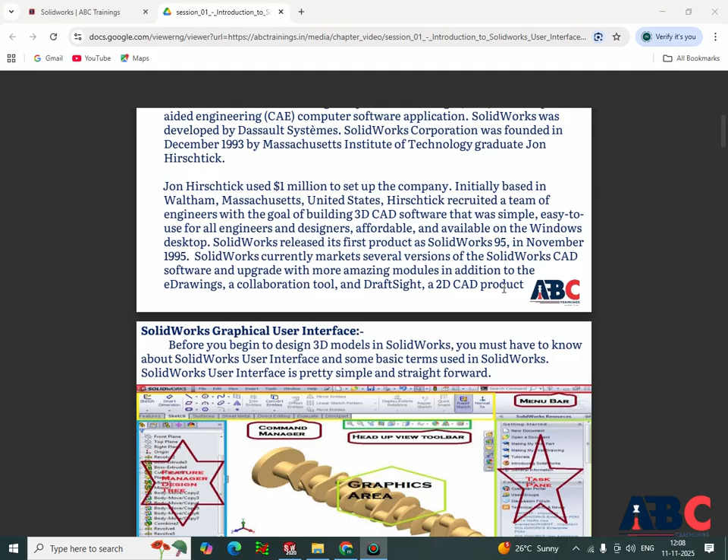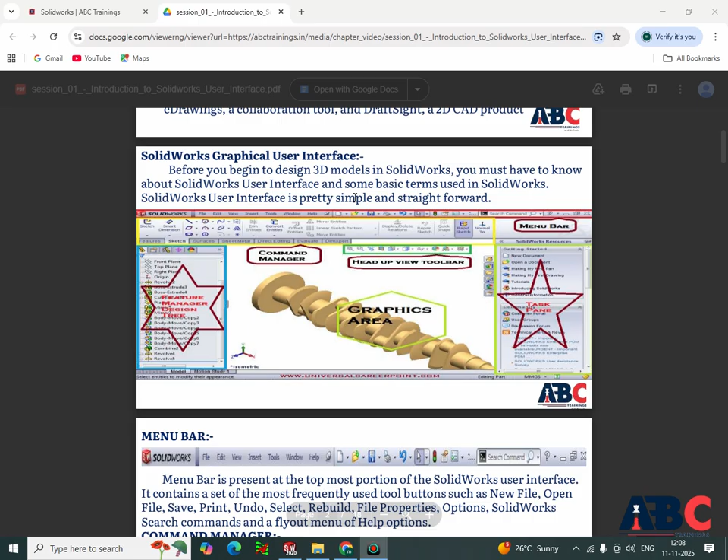SolidWorks graphical user interface. Before you begin designing 3D models in SolidWorks, you must know about the SolidWorks user interface and some basic terms used in SolidWorks. The SolidWorks user interface is pretty simple and straightforward.

See this, what is the menu bar? This is SolidWorks' menu bar. The menu bar is present at the top portion of the SolidWorks user interface. It contains a set of most frequently used tool buttons such as New Files, Open Files, Save, Print, Undo, Select, Rebuild, File Properties option, SolidWorks Search command, and a flyout menu of the Help option.

Command Manager tabs are present just above the drawing area, or just below the menu bar, which gives access to part, assembly, and drawing editing tools. It consists of all the most frequently used productive tools for the designing process, with subsections such as Features, Sketch, Direct Editing, Evaluate, DimXpert, Office Products. When you click on a required Command Manager tab, it shows the respective toolbar.

Feature Manager Design Tree - see this, this is the Feature Manager Design Tree. What is it? This Feature Manager Design Tree, on the left side of the SolidWorks window, provides an outline overview. This feature makes it easy to edit and modify the properties of the design by selecting individual tree functions.

What is the Property Manager? The Property Manager appears in the left panel of the SolidWorks window interface when you select many of the SolidWorks commands such as sketches, extrude feature, and so on. This Property Manager is used to set the properties and other relevant command options to complete your design parameters. It opens when you select entities or commands defined on the Property Manager.

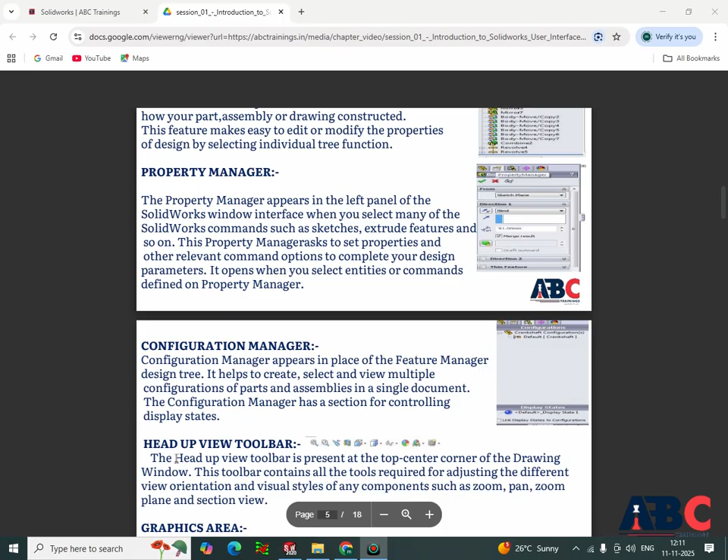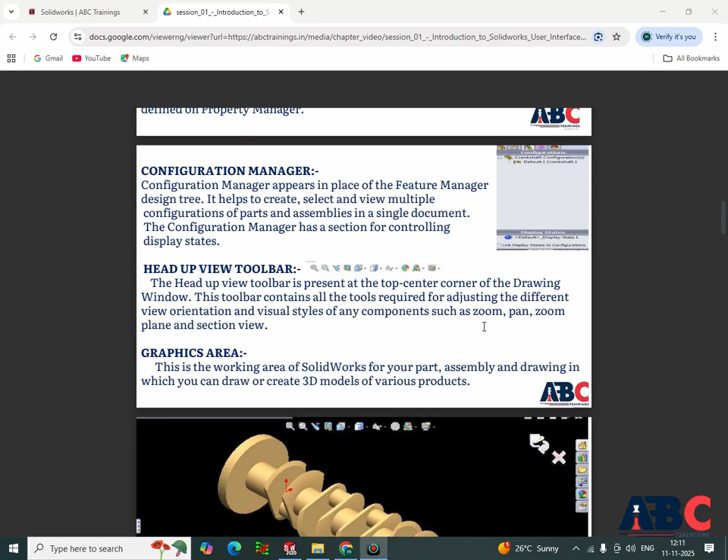Head Up View toolbar - the Head Up View toolbar is present at the top center corner of the drawing window. This toolbar contains all the tools required for adjusting the different view orientations and visual styles of any component, such as zoom, pan, section view, graphics area.

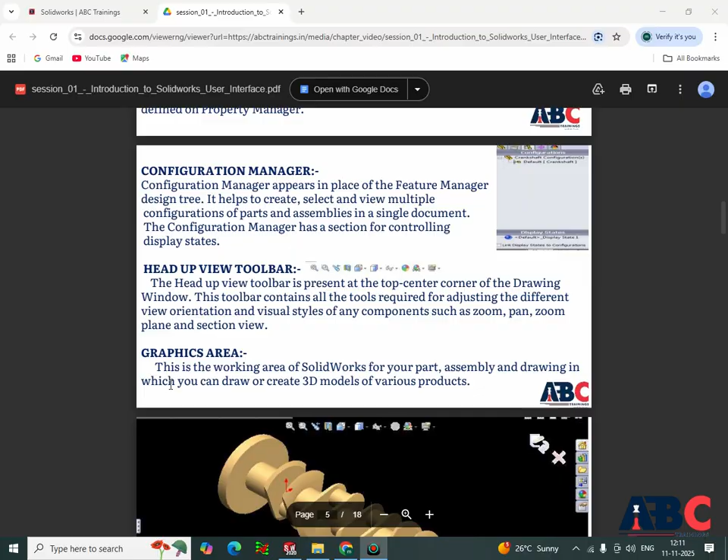This is the working area of SolidWorks for your part, assembly, and drawing, in which you can draw or create 3D models of various products. This is the graphics area. This is the Task Pane. The Task Pane appears on the right side of the window interface.

When you open the SolidWorks software, it provides access to SolidWorks Resources, libraries of reusable design elements for you to drag onto drawing sheets, and other useful items and information. For example, SolidWorks Resource, Design Library, File Explorer, View Palette, Document Recovery, etc.

The status bar at the bottom of the SolidWorks window provides information related to the function you are performing, such as sketch status, coordinate information, commonly used measurement unit, callouts, and handles. Callouts are text-filled boxes that appear in the graphics area when you use certain tools. Handles allow you to dynamically click, move, and set certain parameters without leaving the graphics area.

What are callouts? See these, these are callouts. Callouts help you easily distinguish between different entities. For example, this callout shows the sweep profile and the sweep path. You can drag these callouts to reposition them, but you cannot use them to change any properties of the entity to which they refer.

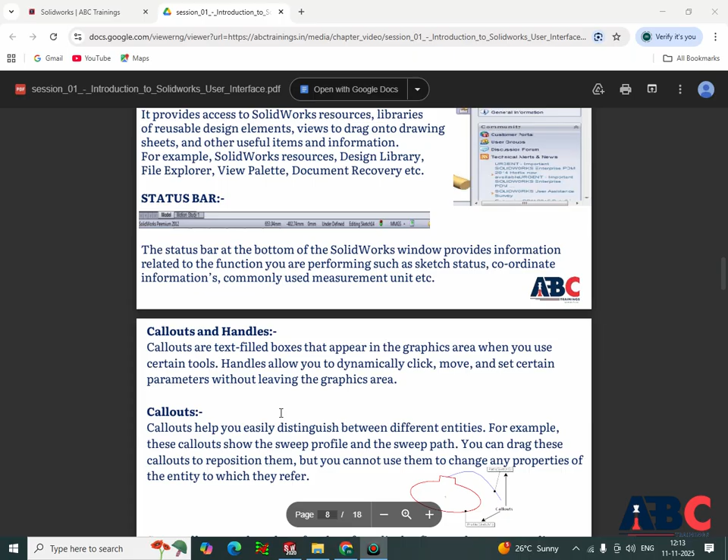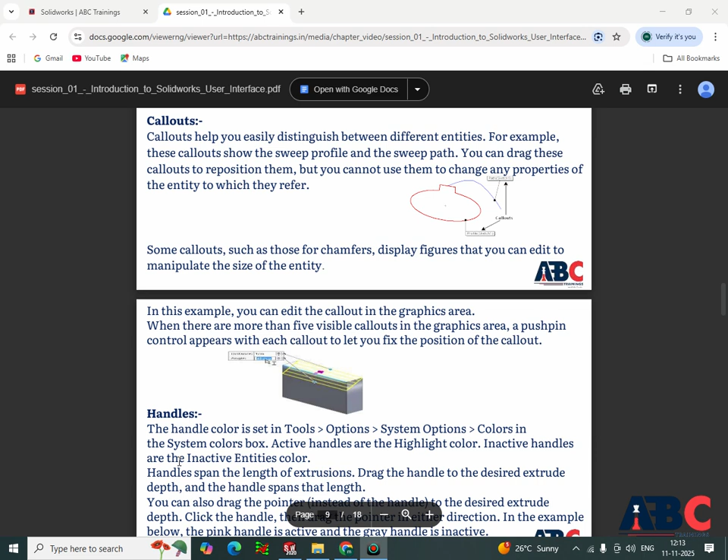Handles: the handle color is set in Tools, Options, System Options, Colors in the System colors box. Active handles are the highlight color. Inactive handles are the inactive entities color.

Handles span the length of extrusion. Drag the handle to the desired extrude depth and the handle spans that length. You can also drag the pointer to the desired extrude depth. Click the handle, then drag the pointer in either direction.

In the example below, the pink handle is active and the gray handle is inactive. One handle has one arrowhead and the other handle has two arrowheads to help you see which direction the handle applies to.

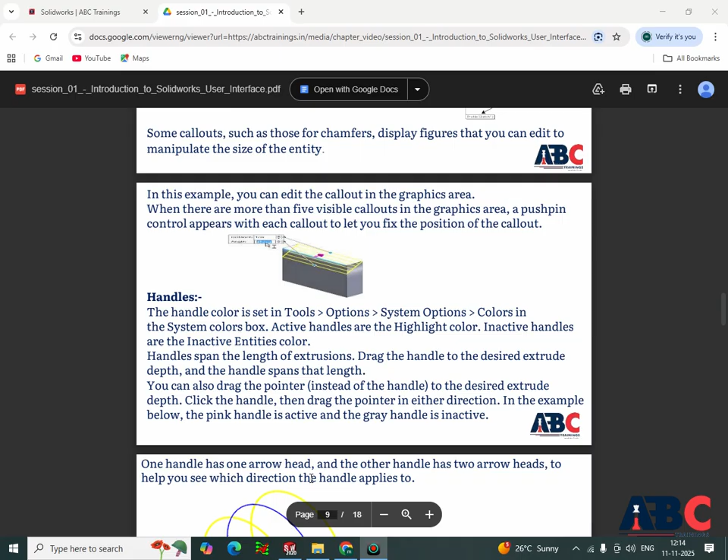To help speed up your workflow in SolidWorks, the confirmation corner can now be more readily accessed at the mouse pointer location by pressing the D key on your keyboard.

When Property Manager is active, the OK and Cancel options are located in the upper left corner of the Property Manager, and in the confirmation corner in the top right corner of the graphics area. But your pointer may be in the middle of the graphics area where you are manipulating the model, so press the D key.

The confirmation corner will appear next to your mouse pointer. See the figure given below.

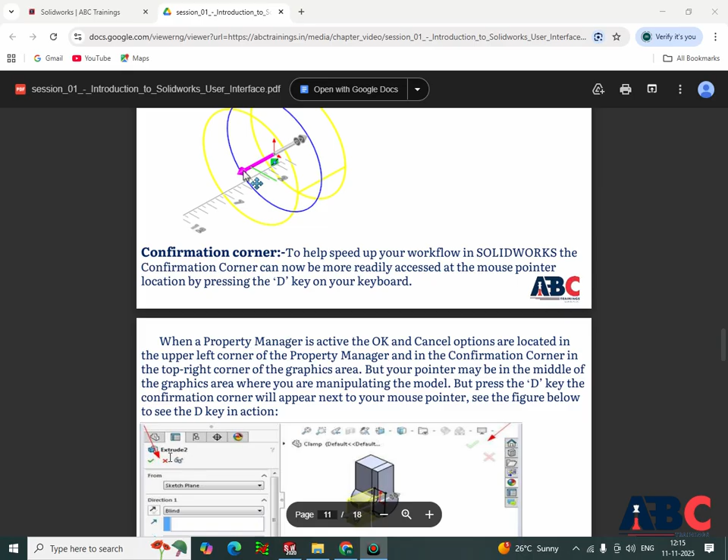Rotate view: parts and assembly. To rotate the model view, drag the middle mouse button. To rotate about a vertex, edge or face, middle click the vertex, edge or face, then middle drag the pointer.

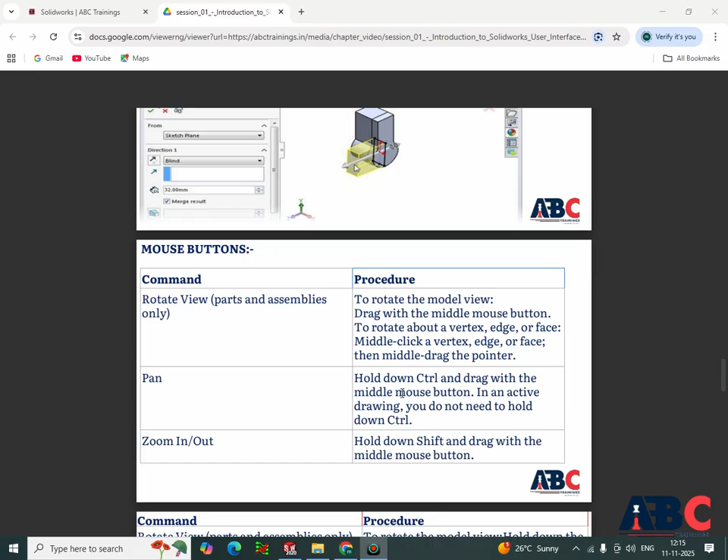Pan: hold down control and drag with the middle mouse button. Zoom in and out: hold down shift and drag with the middle mouse button.

Rotate view: to rotate the model view, hold down the wheel and move it to rotate. To rotate about a vertex, edge or face, wheel click a vertex, edge or face, then hold down the wheel and drag.

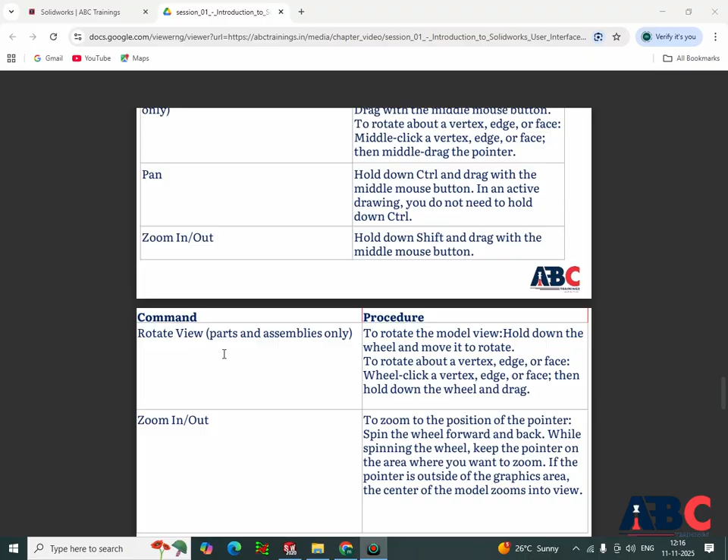Zoom in and out. To zoom to the position of the pointer, spin the wheel forward and back. While spinning the wheel, keep the pointer on the area where you want to zoom. If the pointer is outside of the graphics area, the center of the model zooms into view.

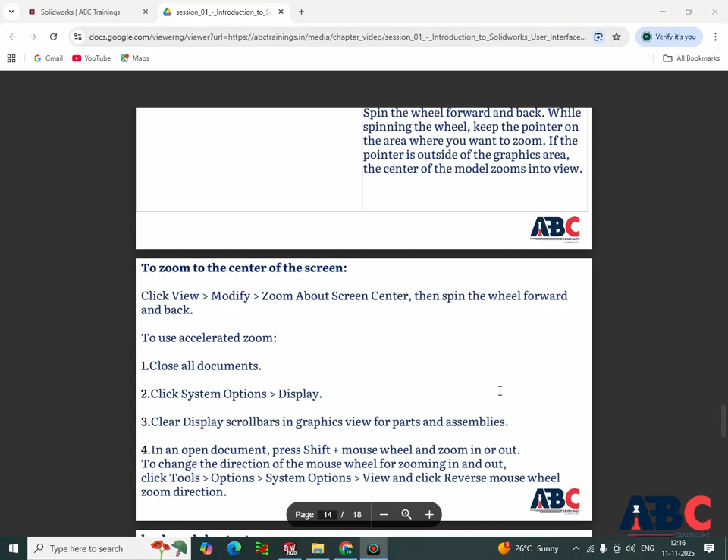Zoom to the center of the screen. Click View, Modify, Zoom about screen center, then spin the wheel forward and back.

To use accelerated zoom, close all documents. Click System Options, Display. Clear display scroll bars in graphics view for parts and assembly.

In an open document, press Shift and the mouse wheel to zoom in or out. To change the direction of the mouse wheel for zooming in and out, click Tools, System Options, View, and click reverse mouse wheel zoom direction.

Keyboard shortcuts: Ctrl N new, Ctrl O open, Ctrl D make new drawing from part or assembly, Ctrl A makes new assembly from part or assembly.

Ctrl S save. Control Z undo. Control Y redo. Enter repeats last command. Control X cut.

Control C copy. Control V paste. Delete deletes. Control B rebuilds. Control Q force rebuilds. S opens a shortcut bar.

Control plus click items to select multiple items. View shortcuts: arrow keys rotate models. Alt arrow keys rotate flat to screen. Control plus arrow keys pan the model.